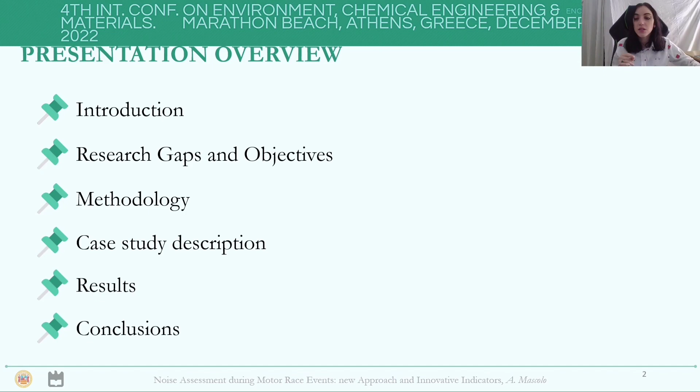So, today I'm going to present the work entitled Noise Assessment During Motor Race Events, New Approach and Innovative Indicators. I will start with a brief introduction on the topic, and then I will pass to the research gaps and to the objectives of this work. I will then present the methodology and the case study and the results of the analysis, and finally the conclusions. So let's start with the introduction.

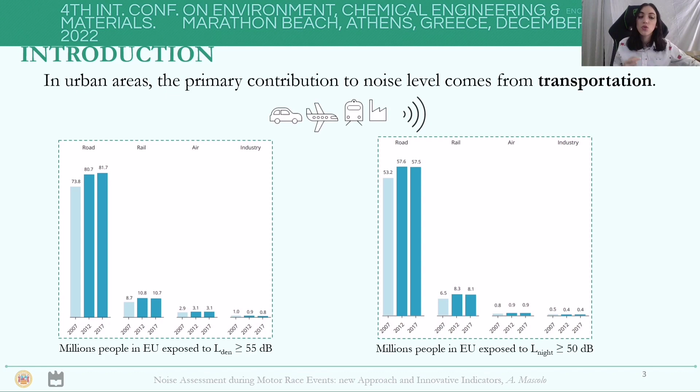Among all the pollutants threatening everyday human health, noise is for sure one of the most relevant. Specifically, as you can see in the graph reported in the slide and delivered by the European Environment Agency in 2020, in urban areas, the primary contribution to noise level comes from transportation, divided into road, rail, and air transportation. In this regard, the effects of high-level noise exposure on human beings are widely studied and documented as short-term and long-term negative consequences.

Although road traffic noise is the most impactful noise source, particular conditions that in a certain way involve it, such as motor race events, are not well investigated. In particular, these events are characterized by large sound pressure levels produced by sports cars, which usually are not required to respect the noise emission limits of city cars.

Taking into account the wide distribution of tracks on urban territory, it appears clear that the number of people exposed to this peculiar noise emission is not negligible, not only in terms of spectators and workers, but also citizens living nearby. In the slide you can find information about the homologated tracks present in Italy, where I come from.

But how can we predict the total noise emission at a certain receiver of a motor race event? In this regard, this work reports a new approach presented by Pascale et al., aimed at characterizing the noise emitted during a motor race event by introducing two new acoustic indicators, namely LEL, that stands for lap equivalent level, and REL, that stands for race equivalent level.

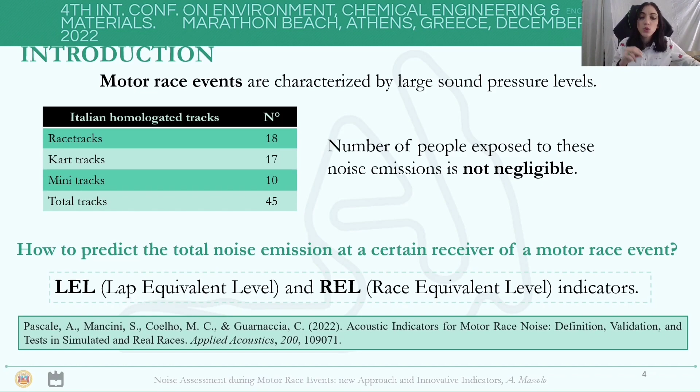But why did we want to study this very peculiar aspect? We have to say that in the last decades, in order to assess noise pollution, research focused on road traffic noise modeling and evaluation. For this reason, there are only few studies on the impact of motor race events.

Moreover, prior to the work of our team, made up by the collaboration between the University of Salerno and the University of Aveiro, there was no specific work in this regard, resulting in a lack of a specific parameter that could assess the noise levels produced by a motorsports event. Such a parameter could lead to a better understanding of how the noise emitted during a race affects the exposed population and the surrounding area.

All this considered, the main objective of this research is to develop, test and validate the use of this new approach and these indicators aimed at predicting the total noise emission at a certain receiver of a motor race event, just knowing the number and types of cars involved.

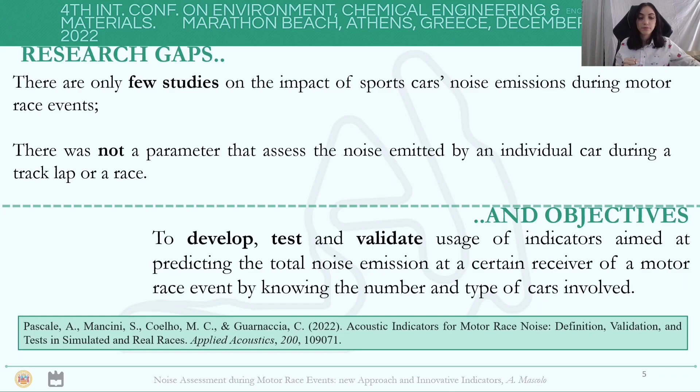The most used indicator in literature and many regulations is the equivalent continuous A-weighted sound pressure level, where T stands for the time interval of interest, usually fixed by the regulation or by the measurement's duration. Starting from this indicator, the research was mainly focused on the definition of these two new acoustic indicators named before, LEL and REL, in which the measurement time interval has basically been modified into t-lap and t-race.

Specifically, the LEL can be defined as the equivalent continuous sound level emitted at a certain receiver by a single vehicle in one lap of the track, and REL is the equivalent continuous sound level emitted at a certain receiver during a race by all the vehicles running on the track.

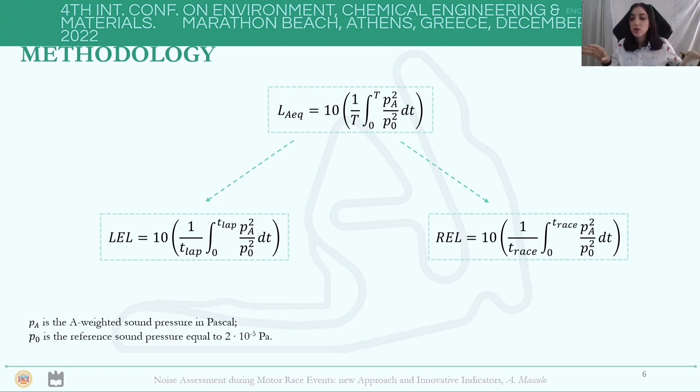This approach makes it possible to assess the noise emitted by an individual car during a track lap in the case of LEL, and by a group of cars during a race in the case of REL.

Point A is at 7.5 meters away from the central axis of the pit straight, where the cars are expected to reach the highest speed. Point B is at 15 meters from the roadway, near the chicane, where vehicle speed is expected to be particularly low. And finally, point C is situated at a turn, about 30 meters away from the roadway.

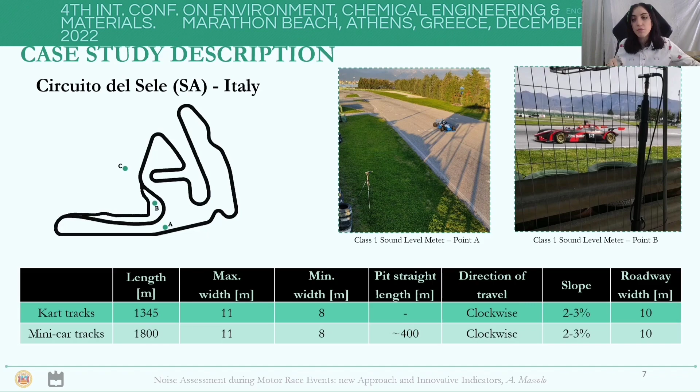Noise data were then collected using Class 1 sound level meters, as shown in the picture, and the equipment was properly calibrated before the measurements. These noise data were collected during two different measurement campaigns. In particular, the first one was held during a single vehicle test session of a Formula X car on 17 February 2022. Then, thanks to the helpfulness of the circuit managers, we were able to take measurements during the official race day of the 12th Super Challenge Trophy.

It was thanks to this collaboration that we were allowed to place the sound level meters at the edge of the track, as you have seen from the picture, in the area that is usually reserved for the sports and technical personnel, carrying out the measurements in safety.

Now I want to show you very quickly some of the videos captured during the 2 days of the measurement campaign. The first one is about the passing by of the single vehicle test session of the Formula X car on 17 February. Let's watch it. The second one on the right is a clip recorded during one of the races that took place on 26th of March.

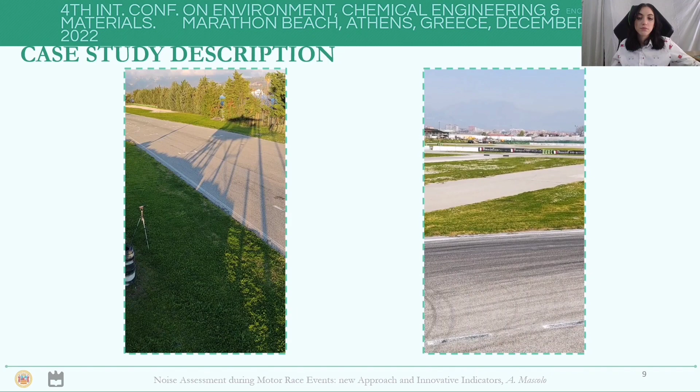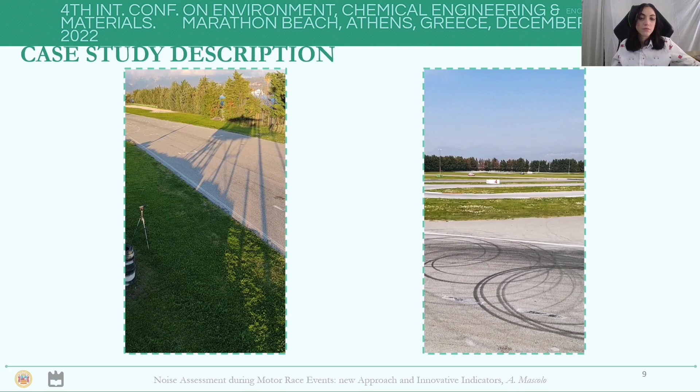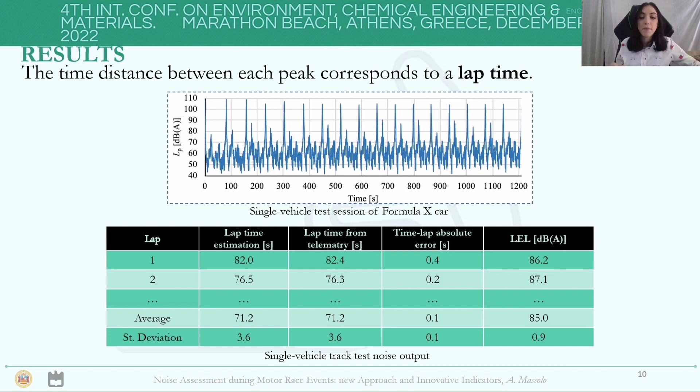So, generally speaking, we can say that the higher the distance from the track edges, the lower the recorded sound levels will be. If the receiver is positioned on a straight part of the track, rel will be particularly high thanks to the fact that the vehicle passes at full speed, generating a high sound level.

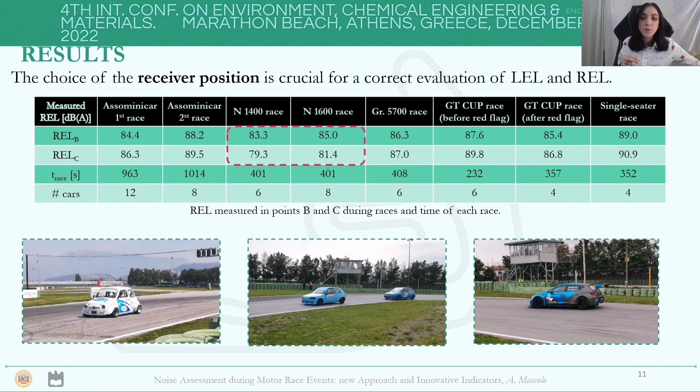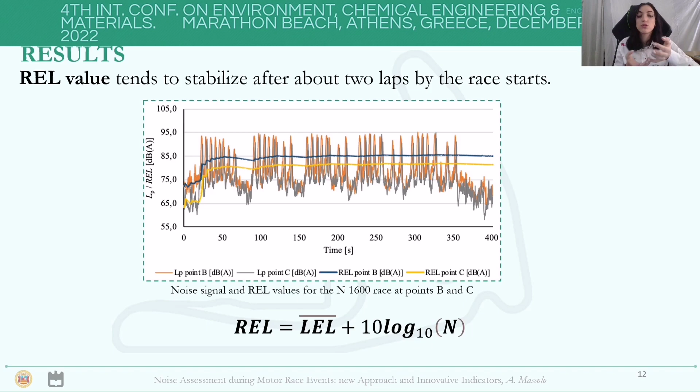With such a consideration, the authors propose to estimate rel value for a race by having the number of vehicles n and an average lap equivalent level at a certain receiver. This could work out assuming that the vehicles participating in the race belong to the same category and have nearly the same noise emission levels.

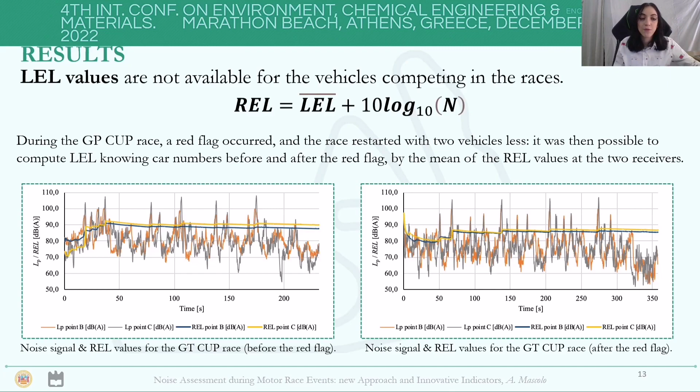It was then possible for us to compute LEL values by inverting the equation and knowing car numbers before and after the red flag, by means of the rel values at the 2 receivers. In particular, the equations in the slide were the ones obtained, useful to simulate rel values at the receiver.

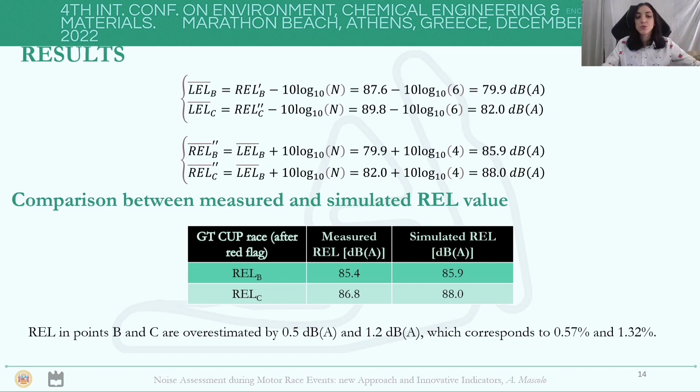Comparing measured and simulated rel values, it can be observed that rel values in point B and point C are overestimated by only 0.5 decibel in the first case and 1.2 decibel in the second case. Such results make it clear how well the identified correlation works and how these indicators actually can be used to predict the total noise emission at a certain receiver of a motor race event.

So, in conclusion, the methodology presented allows to assess noise level produced during a motor race event at any sensible receiver point. It can be applied to any circuit layout and for any vehicle category to estimate how it affects the surrounding areas and the exposed population. The use of these innovative indicators can also lead to compare events characterized by different duration.

Future works will be aimed at generating the noise emission curves for different sports vehicles in order to assess or simulate several operating conditions of the tracks. This procedure can also be used to draw noise maps of the surrounding areas, both for existing and new tracks, with the advantage of separating the contribution of track operation from the other sources.